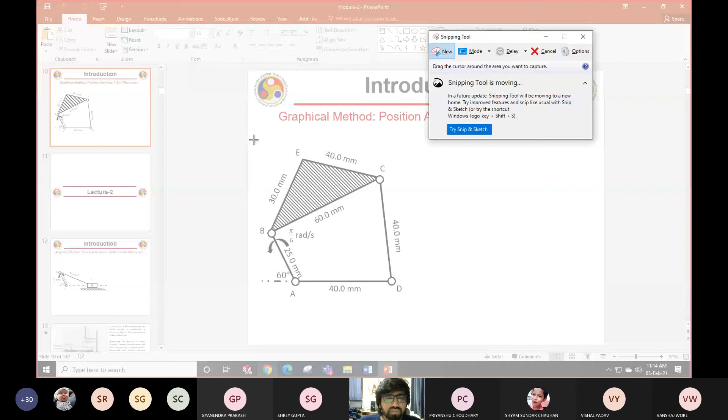So all of you are able to see this, I believe. I can see only 2-3 of you do not have the geometry box, so you just watch, can't help today. But those who are having geometry box, start making this particular one quickly.

Okay, I'm displaying it here as well as in SolidWorks. I'll just give you 2-3 minutes time and you finish it. I already explained the procedure in the last lecture, I'll not repeat.

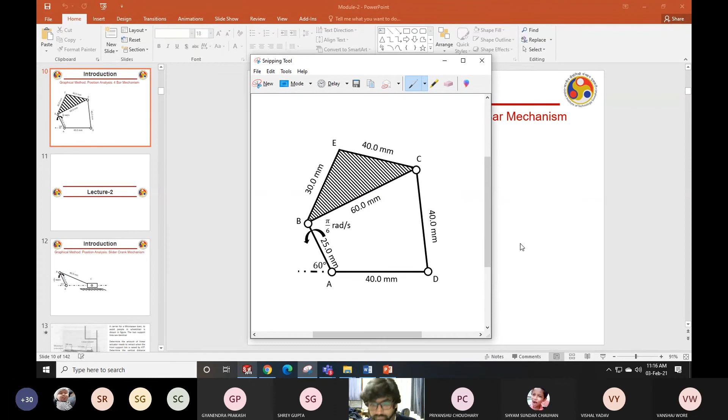Done. Mridul. Mridul. Yes, sir. Done, sir.

Okay, why are you not attending the lectures? Sir, I attended a few, sir. Few, right? On Monday you didn't attend. You are supposed to attend all, right? So on Monday there was a quiz of another subject, sir. I slept after giving the quiz. Wait, Mridul. If you have a quiz of another subject, you will not attend the lecture of this? Is that what you are saying? No, sir.

Note down your name, we'll discuss, Mridul. Anyway, if you have done it, show me. Reverse your camera and show me, you are the presenter. Mridul, if you have done it, show me. Reverse the camera and show me. Yeah, please. You are the presenter, share the screen and show. And note down Sumit, who is leaving.

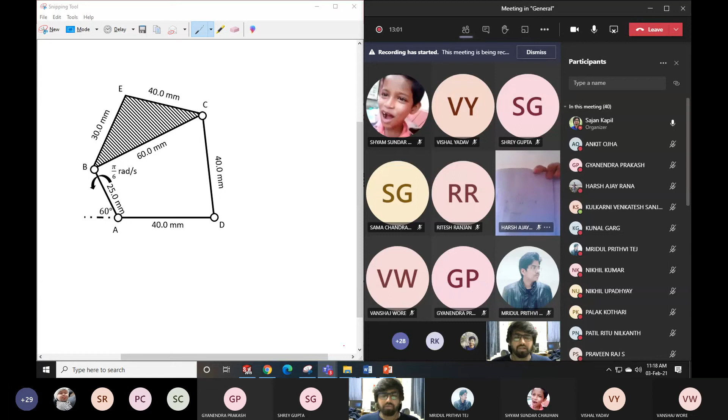Very good, Harsh. Now if you have SolidWorks, I'll show you how you can do it in that, and it is so simple and interesting that you will love this method. So I'm going to start new, not part, not assembly, but directly drawing. And if you have Solid Edge, you can do it in that also. If you have AutoCAD, you can do it in that also. If you don't have anything, you can do it in GeoGebra. There is something called GeoGebra. I'll give you a demo of GeoGebra in the next lecture.

Okay, I'm writing the name over here and I'll show you on the website how it looks. GeoGebra is nothing but a freeware which you can download, and you can draw, plot all these things, whatever I'm doing here. You can give proper constraints, and you can really analyze your linkages, the planar linkages appropriately. I'm writing the name here. It's freeware - even if you don't have a good PC, you can run this software online. You need not even download it.

Now I'll show you how you can do it in SolidWorks, Solid Edge, or AutoCAD. So I am using this option called drawing. I'm using the A4 size page, and I don't want to display anything because I'm not going to make a solid drawing - I'll make something else. So this is the sheet I have, and I just want to make it proper. So this is my sheet.

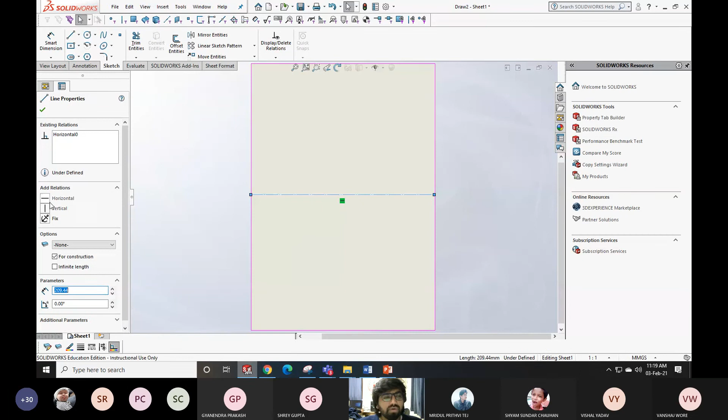On this sheet I am going to draw something. First, what is there? There is a horizontal line which is supposed to be the ground. So I'll draw a horizontal line, selecting the option cylinder, centerline, and this is going to be my ground. This ground is horizontal, I give a constraint to this - it is horizontal and it is fixed, meaning I can't move it. This is in black color. You can see now, correct.

Now what is the next objective? Let me just pull it this way. Okay. I think it will be fine. Anyway, I'll float and check.

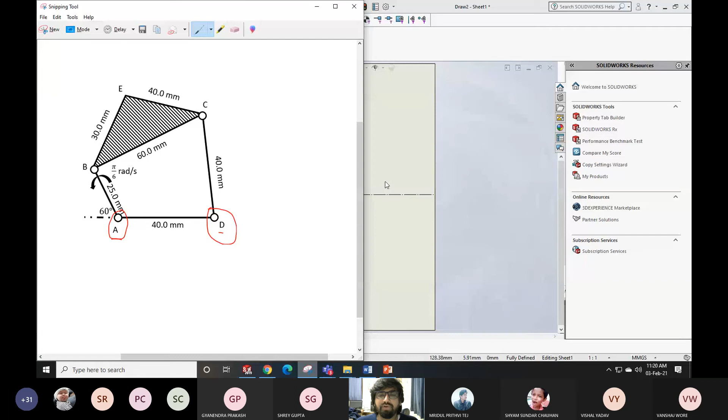So there are two points, point A and point D. They both are attached with the ground, correct? And I have already made the ground a horizontal line. So I'll just randomly pick a point over here on this ground anywhere and call it point A. This is my point A, correct? Now if I want, I can go to annotation and type here that this is A. I can write here, this is point A. Now this is my point A. I hope it is visible to you. Correct.

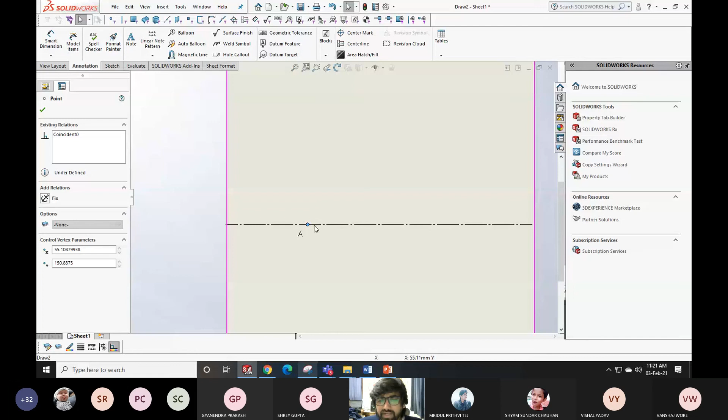Although this point can move here and there right now, it will remain on this line because I said this point should be in constraint with this line - it will be in line with this, automatically. But I want to fix it somewhere, so I'll just fix it. I'll click on the first point and say it is fixed. The point is fixed now, it can't move. And this is what you are doing on your paper also with the pencil.

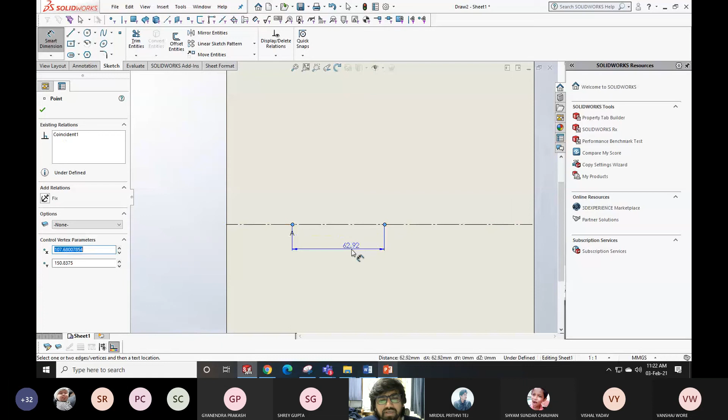In the first step, you mark this point anywhere on the horizontal line. Then you took the compass, and using your compass, measure the distance on your scale, that is 40 mm, and mark 40 mm somewhere here - that will be your point D. So the same thing you can do in SolidWorks also, whatever you are doing by geometry box, just repeat the same thing: this point is on this line, so I selected this point and this line and said that they coincide. Now I'm also going to say that the distance, by selecting the option smart dimension, between this and this is nothing but 40 mm. Correct.

So this is your point B. I'll put an annotation over here calling it point B. Oh sorry, D. This is nothing but point D. So this is point D. Good, done, 2 points have been located.

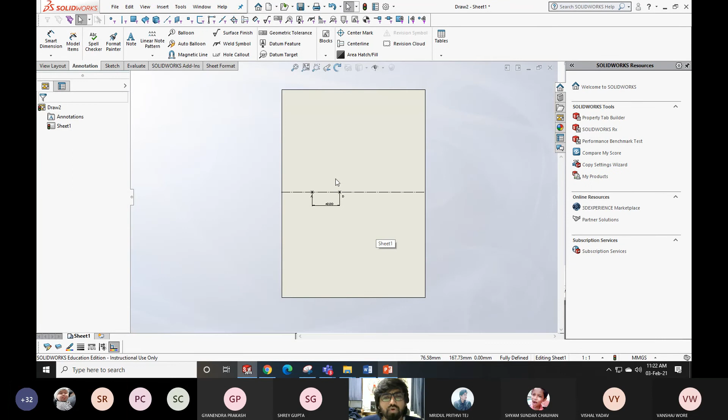Now my objective is to locate the other points like point B and point C. I know the length of point B, it is 25 mm, and I also know the angle, 60 degrees.

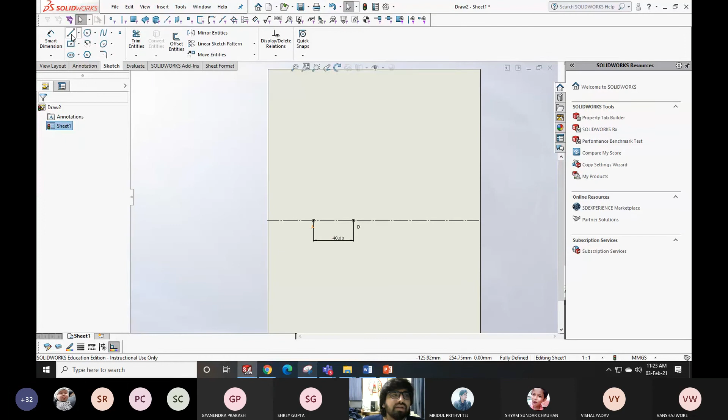So what you can do is draw an infinite line at the given angle, like 60 degree, and then cut the arc on that. What I'll do instead is directly create a line, and this line's first point is A. I don't know if this point is correct, so I'll just randomly put it somewhere. But I know this point should be called point B.

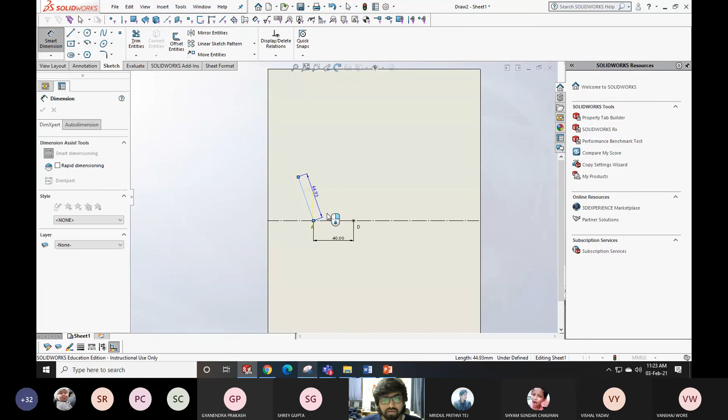What I also know is the dimension of this line, so I'll give the dimension. What is the dimension of this line? It is given to you, this is 25.

The next thing I know is that this line makes an angle from the right side of 60 degrees. So this is the angle. I'm selecting smart dimension, selecting the line and the horizontal line, and this is 60 degree. Done, I have got this line, hence I got point B. So I'll write in the annotation that this point is point B.

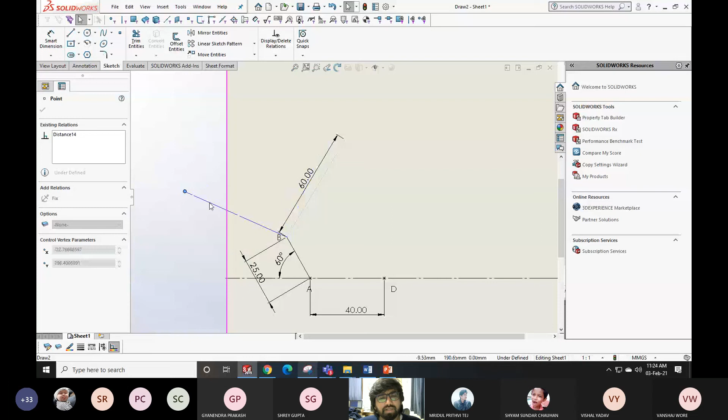But still I don't know exactly, because this line can rotate about point B since I don't know where it is attached. Other than that I know there is another line starting from D with some length, and its length is 40 mm. So I'll go to smart dimension and give a length to this, it is nothing but 40.

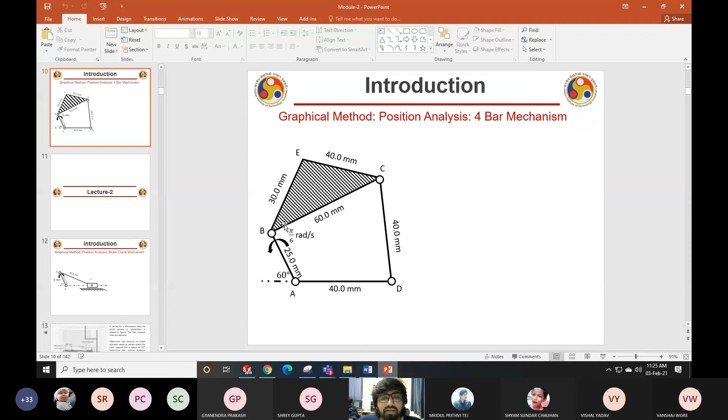Other than that, what I know is that the point on line BC and the point on line CD are coinciding at point C. That means this point and this point are merged together, they are a single point. So I have selected this point and this point, and there is a constraint that they are always merged. I merged them. Done.

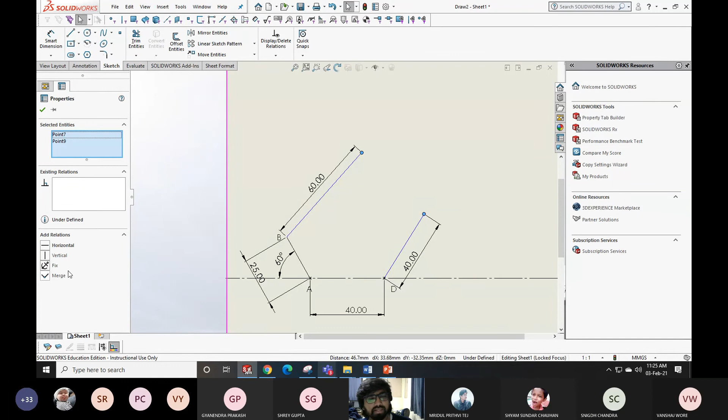Who will tell me, sir, you are pressing control while selecting both lines? Yes, of course. Let me do it again. I have selected this point, and I have selected this point by pressing control, and then said merge. Okay, now you tell me.

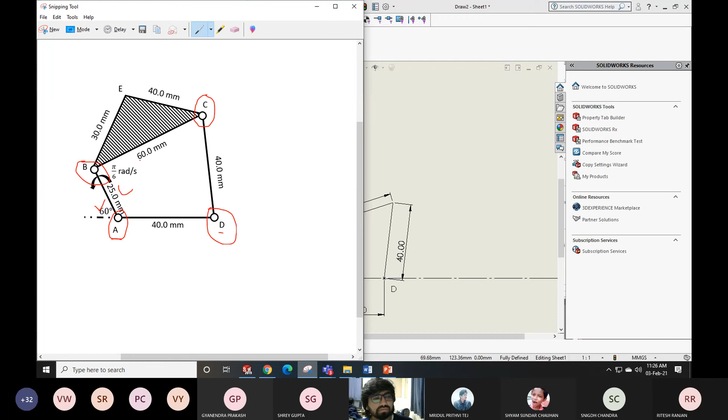Who will tell me, Ritesh? Yes sir, yes sir. What type of chain is it? One second, let me calculate. Quick. Or what are you thinking? Upper side is 60 or what? Yeah, you can see that, right? It's not clearly visible. But okay, can you see here now? Yeah, yes sir.

85, 80, so not following Grashof's law, sir. Not following Grashof's law, right? So what should happen then? Let me just check. Right now this sketch is fully defined, you can see it written here, fully defined. This is because I'm completely defining it. But what if I delete this 60-degree angle from here? What will happen?

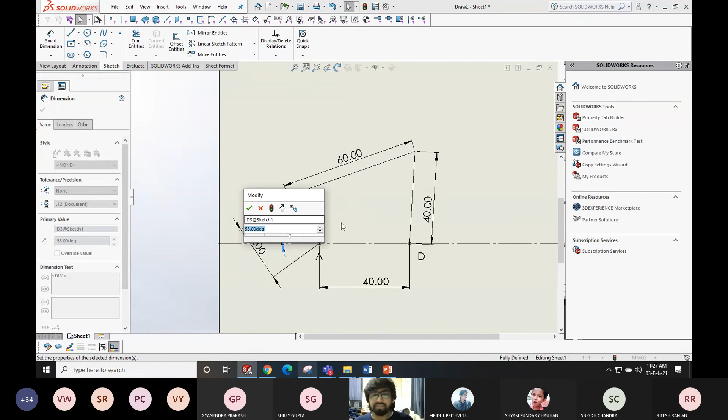Or let me just go back and ask you one question now. Now if the linkage is moving by 5 degrees, that means this is 55 degrees. The whole thing will move. You can really see it, analyzing it appropriately. Otherwise, if you do it by geometry box, it will take some time, not a lot of time, but some time it will take. Now, what if I delete it?

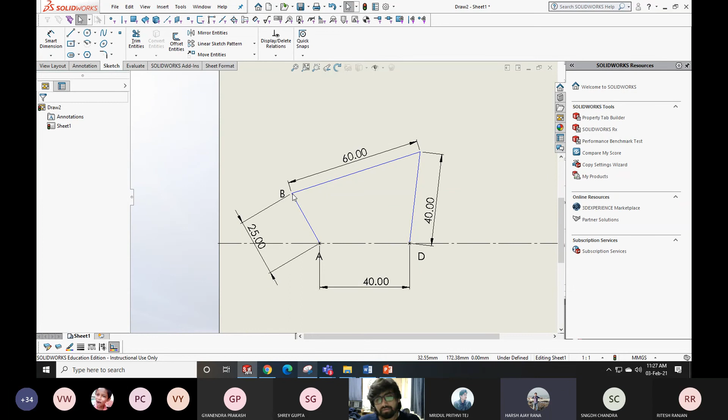What will happen now? Harsh. Yes, sir. Can I simulate it now? Basically, in SolidWorks animation. Right now. Can I really observe? You observe this. Are you able to see this? Yes, sir. But as Grashof law is not followed, so it will not come.

You can see that I'm not able to move it beyond this point. I'm trying, but I'm not able to move. Why is this happening? Because it is not a crank. The smallest link is not the crank which is attached with the ground. That means it is not following what? Grashof law. Very good. Correct? All of you agree with this? So you can simulate it actually here itself.

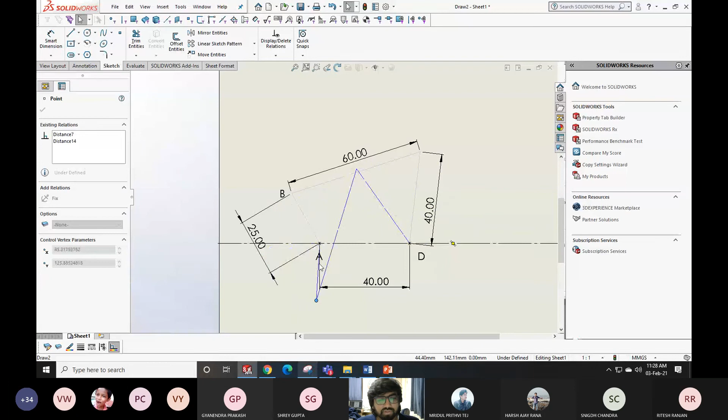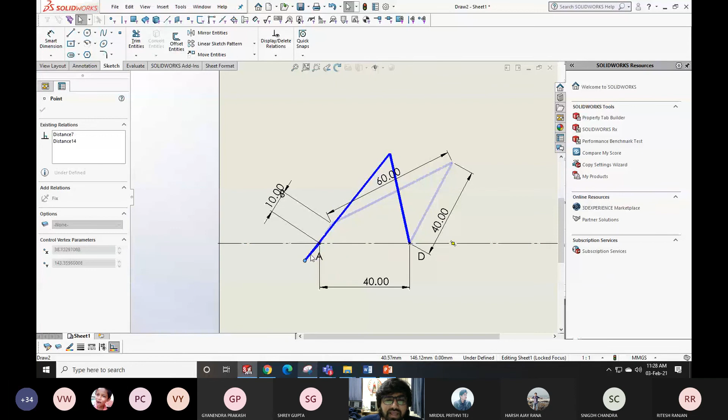Now, what if this length is actually 10 mm? Now, is it a Grashof law? Let me just make these lines a bit darker so that you can see them nicely while rotating. Now, I think it is visible. Is it a Grashof chain now? Yes, it is a Grashof chain, and this is nothing but a crank now. You see that? And you can analyze everything very, very quickly. Like what I can do, you see that.

What is the extreme condition? Who will tell me? I mean, what is the minimum and maximum transmission angle? When do we obtain the minimum and maximum transmission angle? Theta equals 0 and 180. Yeah. So when it is 180, this is the minimum, right? Yes, sir. And when it is here, it is maximum, right?

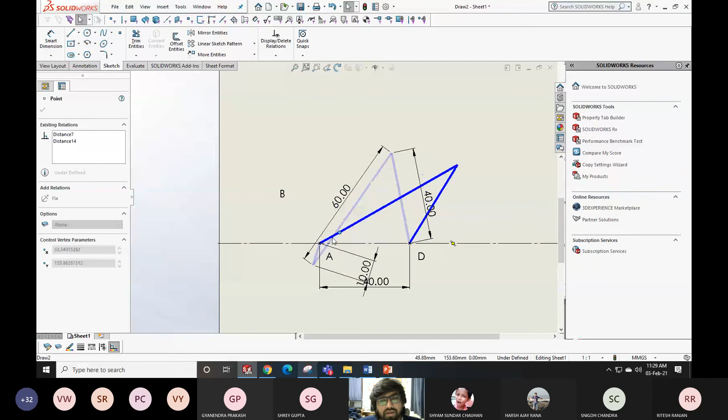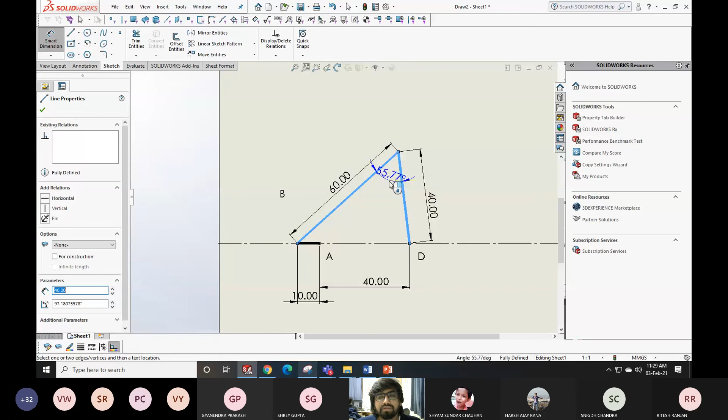Correct. So you can say that when this line is horizontal, at this time, this angle will be what? You can measure it and you can check your transmission angle quickly. It is 26.38. Done. Correct. If it is on the opposite side and horizontal, you can measure it again. This is 55.77. You see how many things I can do.

And let me tell you, you will not find this thing in any book or in any lecture, that you can utilize the planar sketch tool, which is available everywhere, like Solid Edge, SolidWorks, GeoGebra, Autodesk. You may be comfortable with AutoCAD. Anywhere you can do this. You need to just properly define the constraints, nothing else. Right? Isn't it easy? Fine.

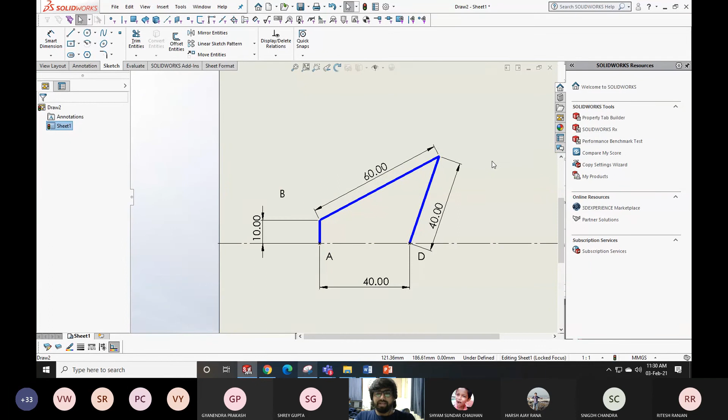Now, not even this. On this, I'm going to build the velocity diagram, acceleration diagram, everything, and I'll be able to demonstrate it to you online. So please do not ignore these lectures. That is what I'm saying. Please inform your friends about these things. You will not get it in any book. So you will regret it if I ask some questions from this.

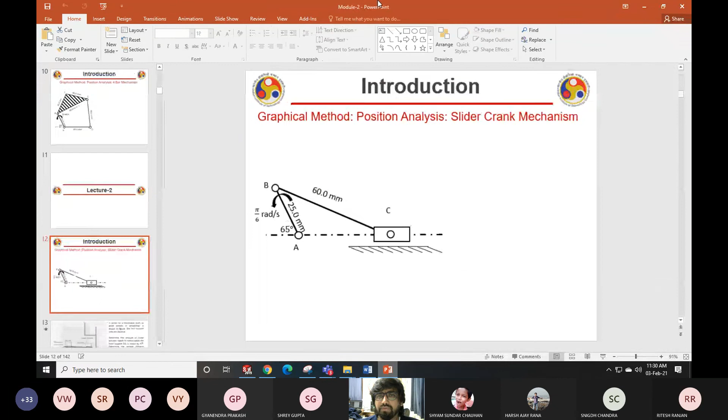Okay. Now let us move to the next problem. This is the next problem. What I'm going to do, I'll just share this screen with you, only this one, and I'll give all of you some time, maybe 3 minutes, and you quickly draw it. Are you able to see this? It is a slider crank mechanism. Draw it. The position analysis.

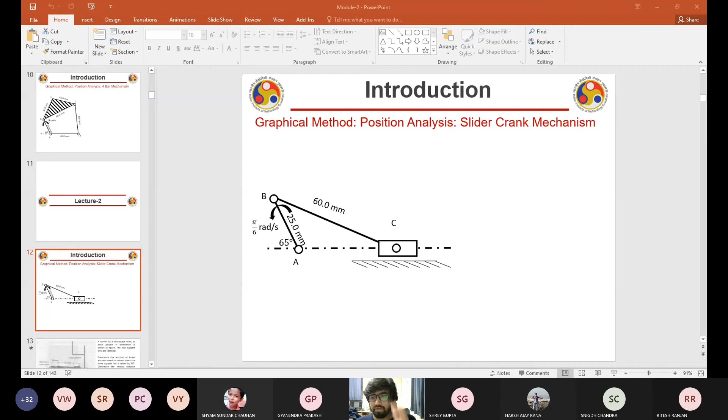Done. Ankit Oja, done? Almost, sir. Not yet. Okay, finish it. Now I'll just quickly show you how you can do it in SolidWorks also.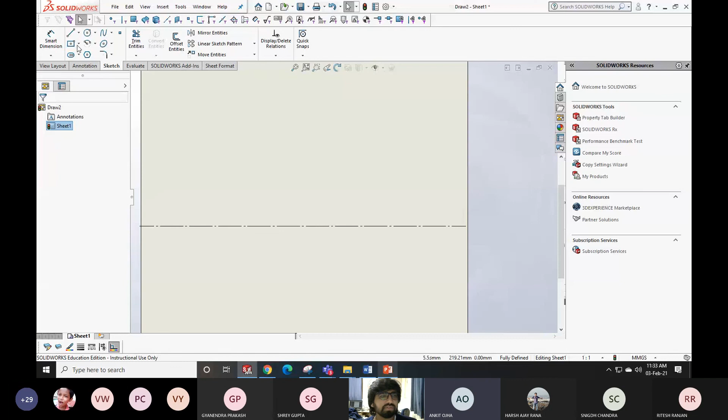Okay, so its dimensions are 25, 60, and this dimension will keep on changing. So randomly, let me first select a point A, in a very similar fashion. This is my point A, and say that this is fixed. I'll say this is a fixed length. It is not moving at all.

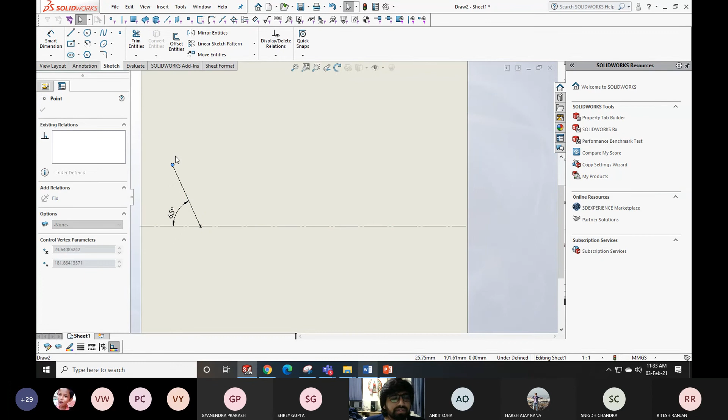Now what you will do, you'll make a line at an angle of the given value, 65 degrees from the horizontal line, right? 65 degrees, and you can see that this point is still changing because its length is not fixed. So I'll just give some length also to this, correct? And its length is going to be, I think, 25, right? Yeah, 25.

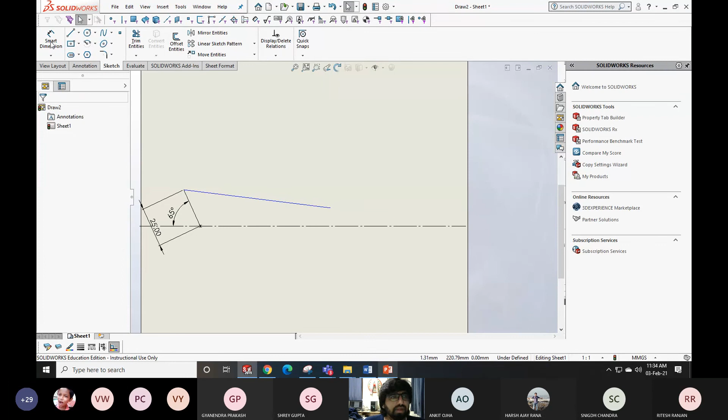So 25. Done. Now this is 25. What we'll do next: I know that there is another line, and I know its length is 60 mm, correct? This is 60 mm, so I'll write here 60 mm. Other than that, I know something, but let me not do it right now.

Now I have to make a slider. Approximately it should look like a slider. So there is a rectangle here, so use this rectangle tool and draw it, and approximately give some dimension to this block so that it looks like a slider moving. And I am calling it 10, 10. If you are doing it in GeoGebra, don't waste much time on making the rectangle. You can just assume that this point is moving and consider it.

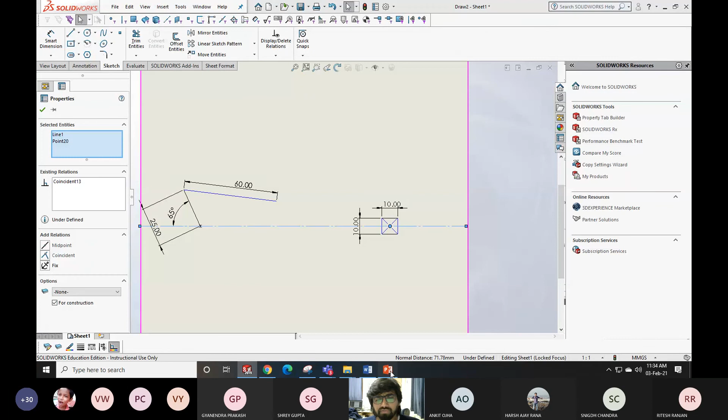So now this point is coincident with this all the time. The center of the block is coincident. That is what you can see in the diagram also. The center point is coincident with this center line, I mean the ground. So this is coincident with this. And now you can see the block can move back and forth. It is free to move. The only constraint remaining now is that this end point is attached with this. So I have selected this point, pressed shift or control, selected this point and set coincident.

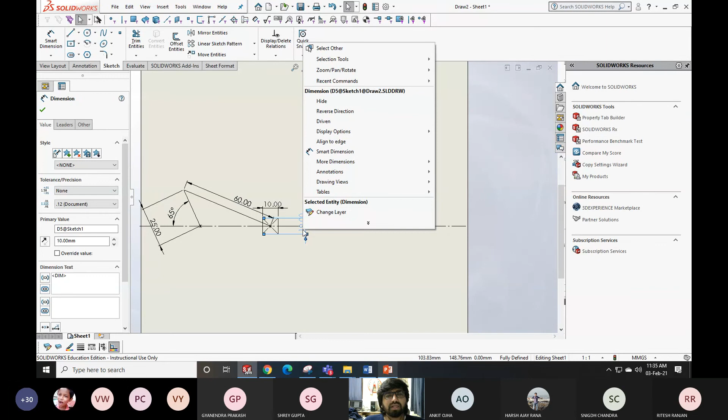Done. Now these dimensions are really not of my interest. What you are seeing now here, this 10 and this 10, is just because I gave the shape. They are not adding any value. So I want to hide these dimensions. I click on this and hide it. Click on this and hide it. I don't want to see it. Other than that, it is fine. If you want, you can do more annotation, like you can fill the hatch area inside this. Okay, maybe solid. I'll hatch.

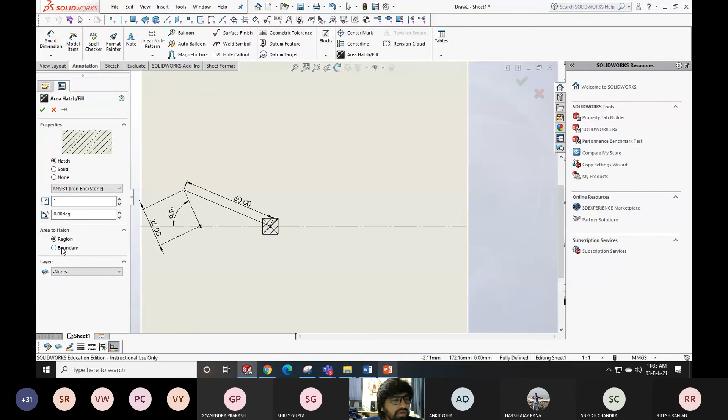I need to select the boundary. Yeah, done. And maybe I'll just have more hatching lines. 0 degree is fine. This looks good actually. Or solid. Solid is good. And I want to increase the numbers. Or some other line, dash line is fine. Or cross is better actually. Yeah, this dot is good. How to increase the numbers? Scale. Okay. Maybe this is good.

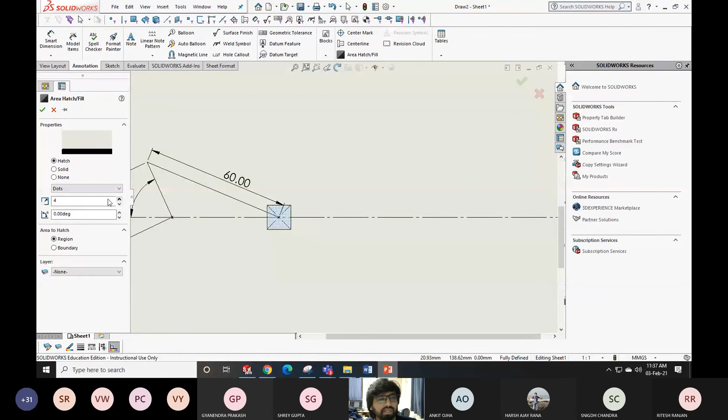Oh, it got hung. Wait. I clicked many times, it got hung. I cannot stop it in between. Okay, it will take a few seconds because I clicked several times here to increase the number of dots. Yeah. Let us close it and restart. Fine, no issues.

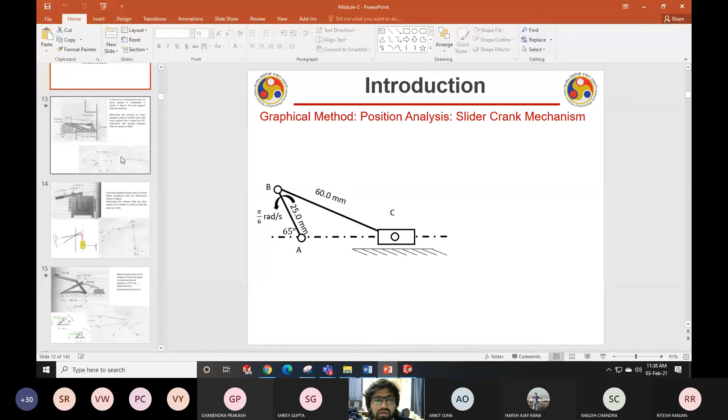In the meanwhile, as this restarts, I hope you have already drawn this. It is the easiest problem actually. And after that, you can measure the angle between the connecting rod and the ground. How much is it coming in your case? Maybe I'll ask Palak Kothari, how much is it coming? The angle between the connecting rod and the ground when the crank is at 65 degrees. Sir, 22. Okay, Harsh, what is it in your case? Yes, sir, 22, sir. Okay.

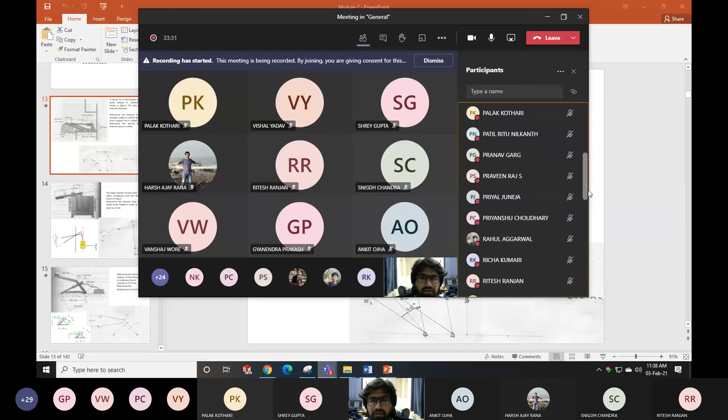Now quickly, can you change the position of the crank to 60 degrees from the ground? Then what will be the angle between the connecting rod and the ground? How much is it coming? Aggarwal. Sir, I am redrawing it for 60 degrees. No, you need not redraw. You can do it quickly there itself, on the same diagram.

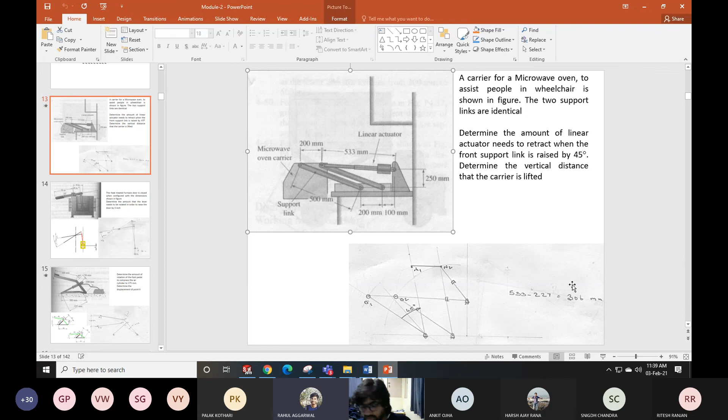No, why are you redrawing? I'm doing it in my notebook, sir. No, where? In copy. Yeah, okay, fine. But there is no point in redrawing it. I'll just quickly show you how to draw this again as it was. And this time I'll not use hatching, or maybe we will hatch only a few lines.

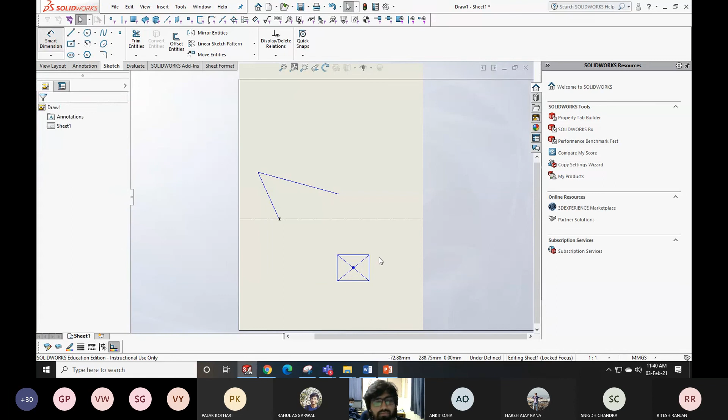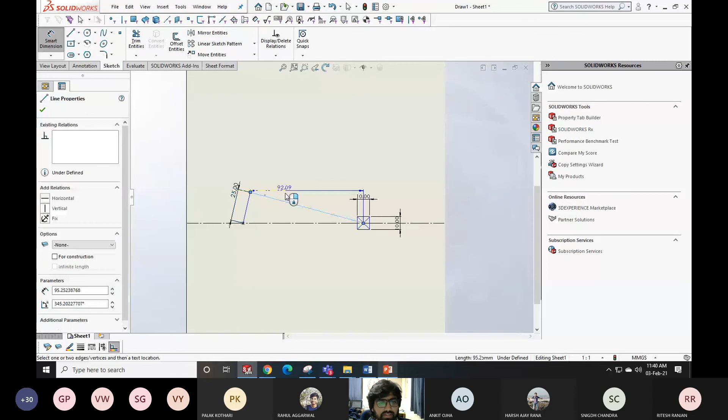So it's a horizontal one and the fixed one, and there's a point on this which is also fixed. This is point A. Now I have a crank and then this another line, and there is a block also. We gave the dimension to the block, maybe 10 mm, and this was also 10 mm. And this point is coincident with this, and also this point is coincident with this. This length was 25 mm and this length was 65, I guess, or 60, I think. How much is it?

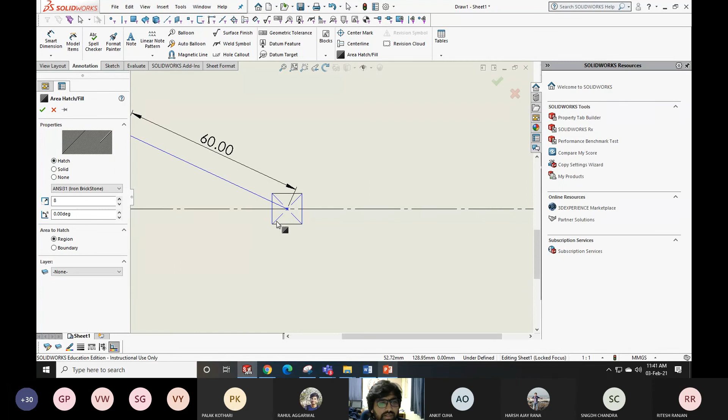Yeah, 60 mm. Now I can move it to any position and you can see that it is behaving like a slider. So I'll just hide this dimension so that it will look good. Hide this as well, and now you need to just go to annotation and hatch the area. So the area which is going to hatch, I'll increase the number maybe to 8. Done. Now you can see that it looks like a block, and if I rotate it, it is rotating. It is a perfect slider crank mechanism. I hope you are able to see this.

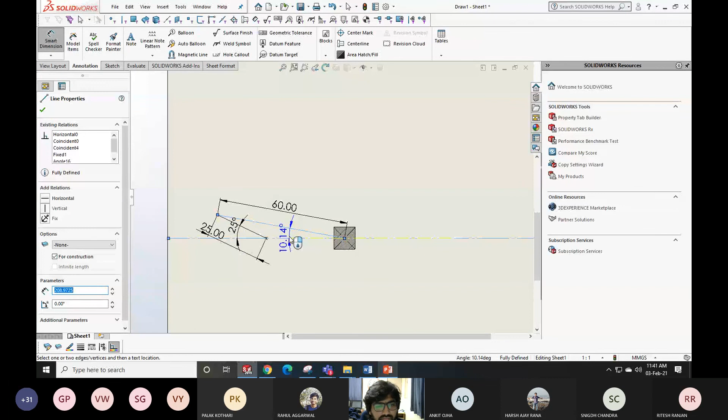Now, if you want to analyze quickly the angles, you can analyze. If this angle between this is 25, fine. This is going to be the angle. Somebody has just said that this is going to be 10 degree. Oh, 65, for 65 I asked, sorry. So it is coming 24 for 65. Yeah. No, it is 22.19.

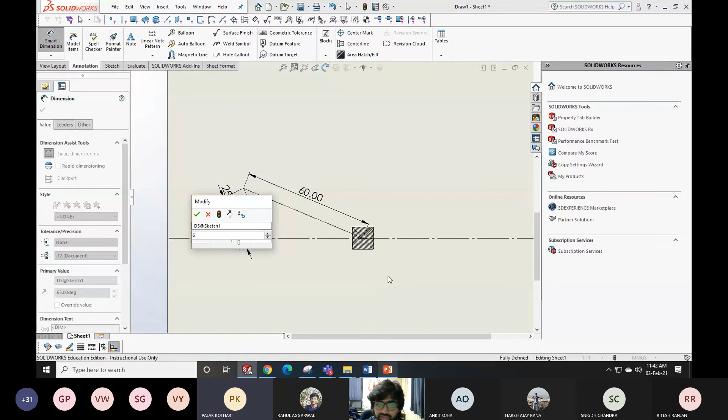For 65. Oh, you are saying for 60? Yeah. No, sir. For what angle? Then I asked for 60, na? Oh, yes, sir. Sorry, sir. It is 21.15. Yeah. Okay. So it's very easy, right? You are finding it very easy to do, right?

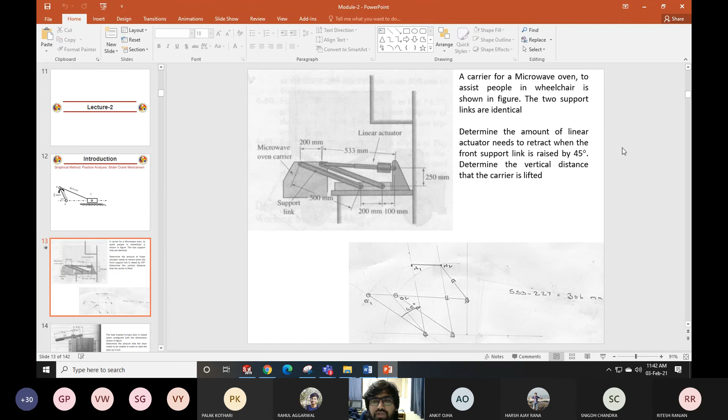Now let me ask you a real life problem, which you will be able to appreciate in a better way. So I'll just show you the next problem over here. A carrier for a microwave oven to assist people in wheelchair is shown in this figure on the left side. The two support links are identical. Which are the support links? These two support links. This link and this link. They are identical, means their length are same. They are parallel too.

Determine the amount the linear actuator needs to retract. Where is the linear actuator? This is the linear actuator. It is written also. That means it is nothing but your piston cylinder arrangement. It can move up and down, right? Determine the amount the linear actuator needs to retract when the front support link is raised by 45 degree. Correct? Determine the vertical distance that the carrier is lifted.

So what I'm going to do, I'll just share this problem with you, only the problem, and I'll give you some time. Maybe I'll give you 10 minutes to solve this problem. Solve it. Is it visible to everyone? Yes, sir. Okay, solve it. If any doubt, let me know. What will be the first step, Rahul?

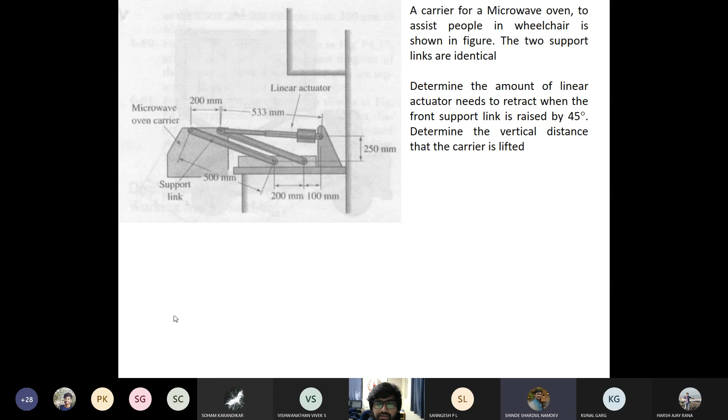Okay, fine. So the answer is, I think what I'm getting on SolidWorks is 33.79, and by this also you can see the new length. Needs to retract by the 45 degree, determine the vertical distance. So retraction angle it is asked, so you need the difference, but anyway, new length also, if you are getting around 333, that is correct. Okay, so anyway, I'll just show you now in SolidWorks so that you can match your answer.

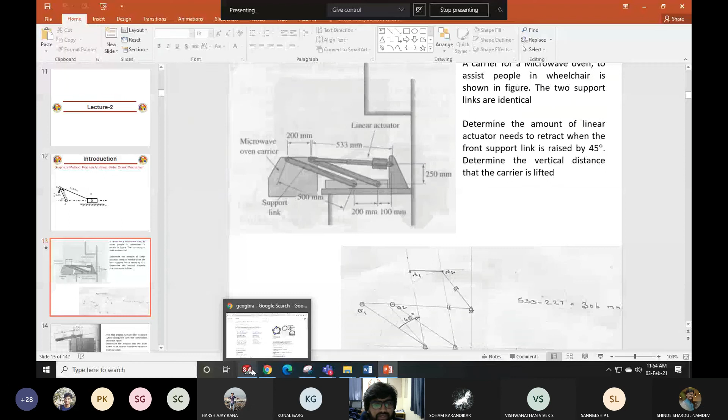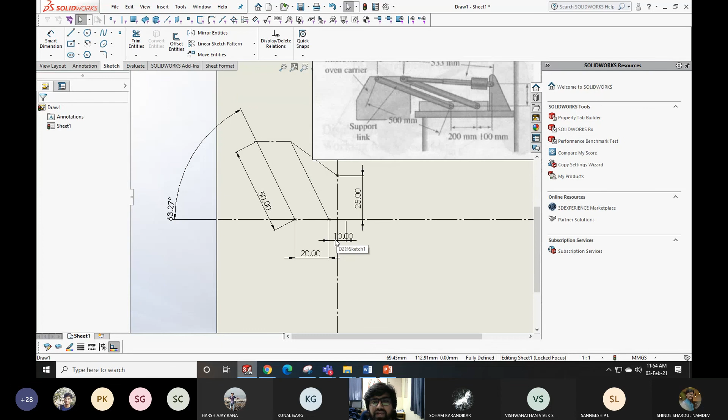Right now I have not made the slider exactly because I want to solve it quickly, but that is what I have done. I have created first this point, this ground over here, and then this ground point over here at a distance of 200 mm. Then I also know that there is a vertical ground. This triangle thing is also nothing but a ground. So I created one vertical line at a distance of 10 mm, and at a distance of 25 mm from here, I created another point that is nothing but this hinge point.

Then I draw a line from this point to that point, and I'm saying that this entire length is nothing but my actuator's length. It may change also. Then, how did I draw these two parallel lines? I draw one line from here and another line from here, and I said they both are of equal length because it was said that they both are identical. So if you click on this, you can see the constraint is given equal length.

Then this distance should be 200 mm, and all the time they are attached with a horizontal line. They can't move apart. So I draw a horizontal line. And I said that the distance between this to this, which is 20 here, will remain 20 here as well. And of course, that is true. Now, if they are both parallel also, they can move like this. So that is your mechanism.

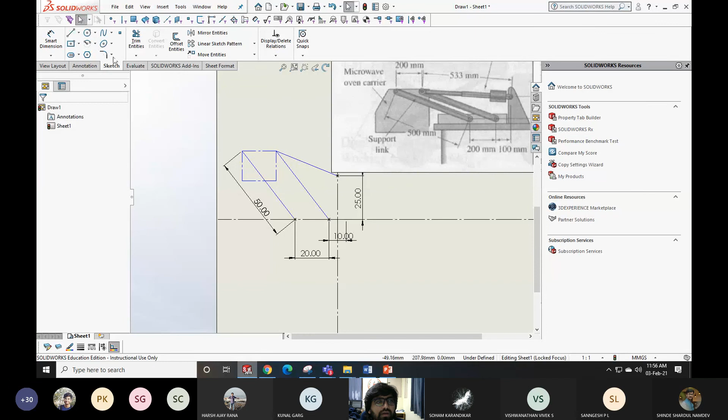I have not drawn this particular thing completely. This entire thing can also be drawn, so I was skipping it for the time being, but that is how the mechanism looks. It moves like this. I think we have 2-3 minutes, let me draw it approximately, not exactly. Assume that there is a block like this connected with this, and I'm going to give some dimension to this block, maybe 20 mm. It is already given that must be 20 mm all the time.

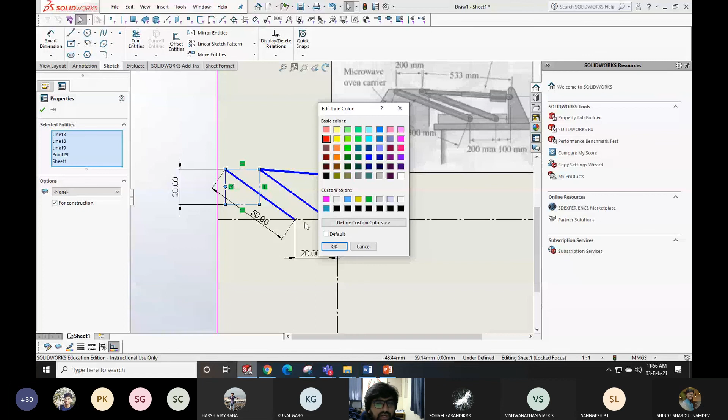Now, in this mechanism, if somebody is moving this thing, this is a link, this is a link, this is a link. Let me make them thicker. And this is the block connected with them. This dashed line is nothing but the block. I'll give a different color, red, and its thickness slightly high, but in dashes. This I forgot, this also red color, and thickness also high.

Now if I move it, can you observe that this thing, called the microwave oven carrier, is moving only horizontally all the time? That means the mechanism is good. You can even analyze the mechanism. But one constraint I have not kept is the actuator, which I have considered as actuator because its length can contract and increase. Right now its length is how much?

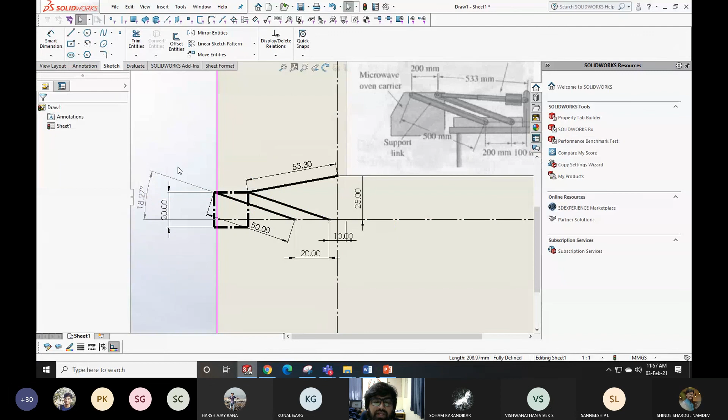53.3. Correct. If it is 53.3, then I can measure this angle right now, and this angle is coming as 18.27. It just showed me an error that I'm over-constraining it. This is because I need to delete this length, because that is my input now. Okay, and hence what I'll do now, I'll just give some angle between this and this. That will be in addition to whatever is already there.

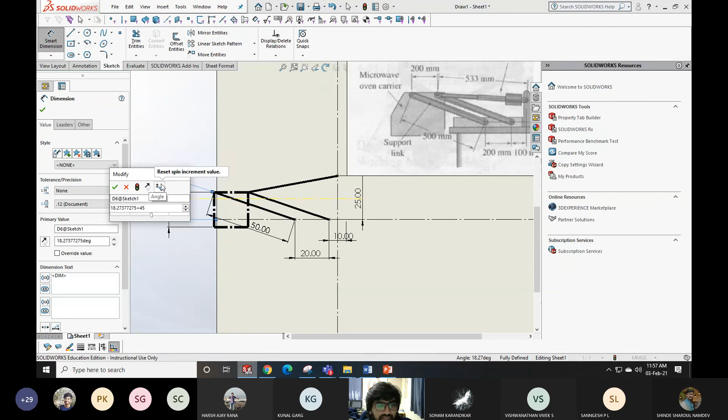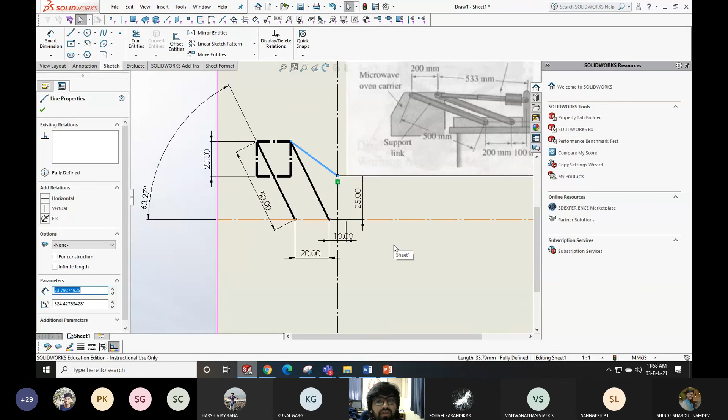Right now it is 18.2737 something, and I'm saying if it is raised by 45 more degrees, then this will be the new position. Correct. Hence this is your new length. This new length is 33.79. So 33.79 is the new length, and I need to multiply it by 10 also because it is scaled. 337.9 is the new length. Old length was 533.0. Correct. And you can find out the difference to get the change in the length of the actuator. Is it clear to all of you?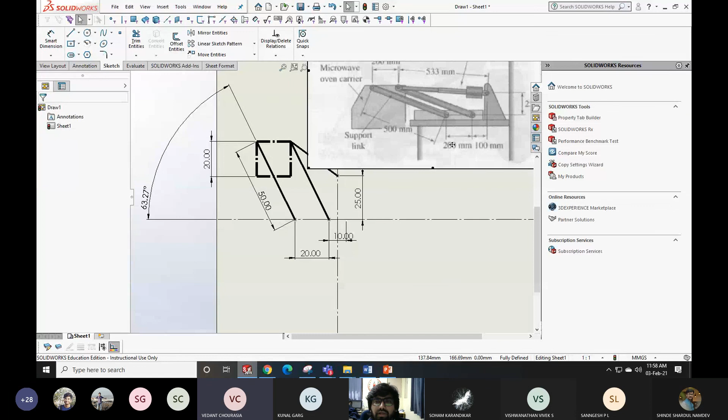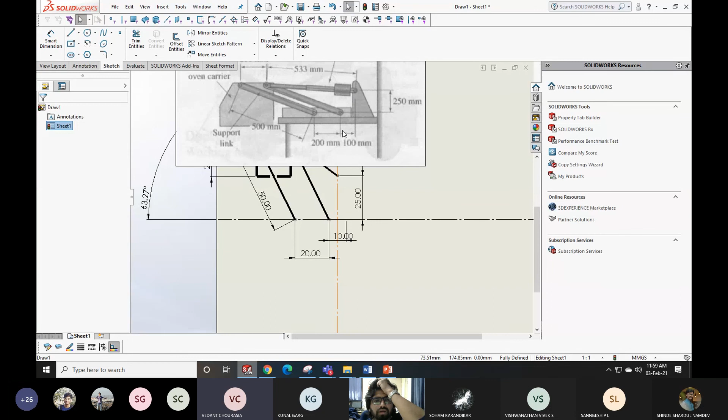Vedant Chaurasia. Hello, sir. Yes, Vedant. Sir, can you go to that SolidWorks? I was asking that 100 mm and 250 mm should come in the same line, no? Or it won't affect? The 100 mm and that 250 you have in the diagram are in the same line, and in SolidWorks you have taken it to the right side of the vertical line. What did I do? Which line? See the 100 mm and that 250 mm, they come in the same vertical line, right? No, this hinge and this hinge. The distance 100 mm towards the right and that 250 mm upside, they come in the same line. But in SolidWorks you have made it some distance apart, right?

Wait a minute. Let us clear this doubt. I'm not getting it. So, for example, this is a point. Are you satisfied? This is fine here. Yes, this point, sir. Then this point and this point. Is it okay? Yes, sir. Okay. Then this point, how do I draw it? Because this point is on a vertical line over here. Assume there is a vertical line here, which is not visible. Yes, sir. So this is the vertical line, and this vertical line is 100 mm apart from this point. So I did 10 mm apart from this point.

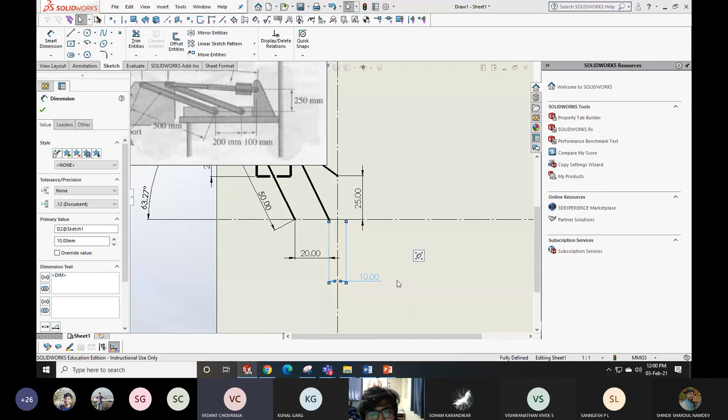So see, in SolidWorks it's not coming in the same line, right? I don't know why I made a mistake. This point and this distance. Oh, why is it? I'm sorry. Now is it okay? Yes, sir. I don't know why that happened. Yeah, you are right, Vedant. Very good. So this is 10 mm apart. Oh, now the answer will also change, na? Okay, 37.97.

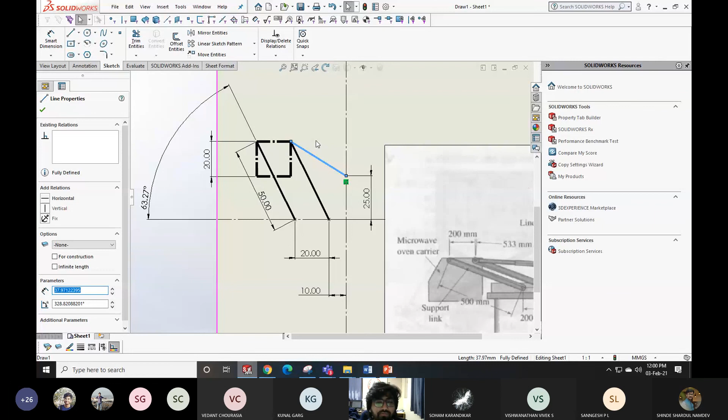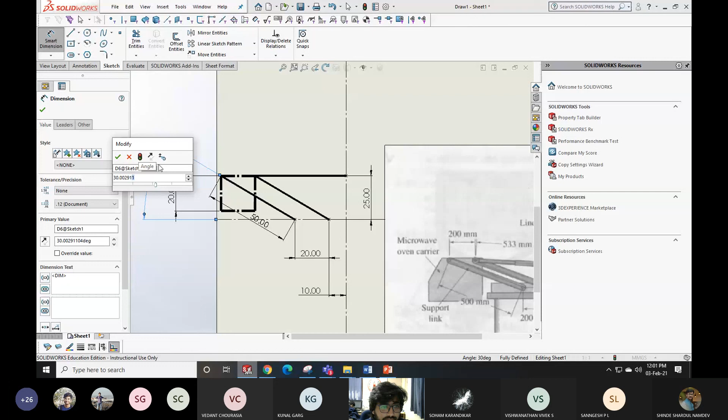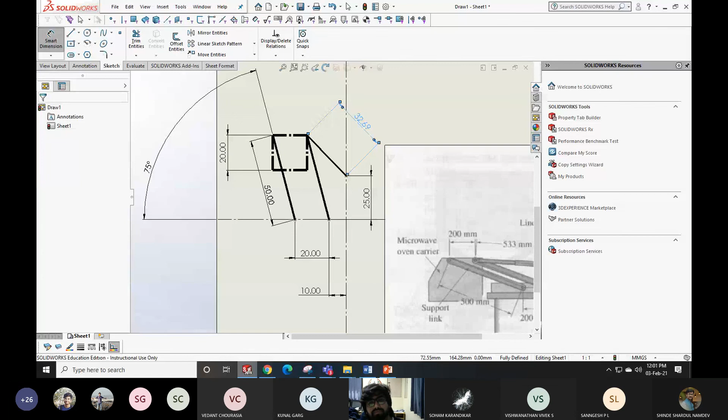Who has got around 33 or something? Priyanshu, Harsh, Shreya, Shrey, Kulkarni, Palak, Richa, Vishwanathan. Okay. Those who have not got it, okay, fine.